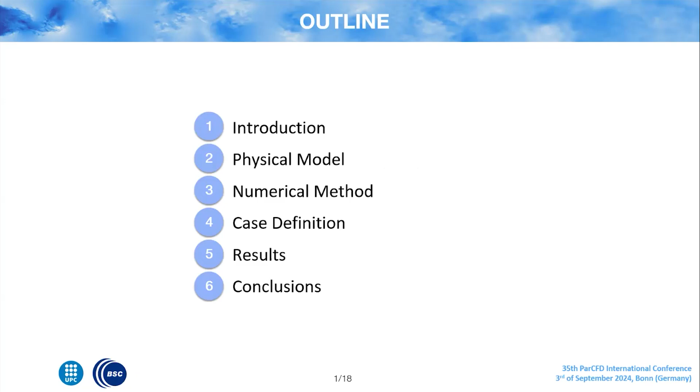Okay, so my name is Duro Diaz, and I am going to present the first results we obtained in the project named towards high-fidelity simulations of urban flows. This will be the outline of the presentation.

And to begin, cities have been regarded as centers of economic and demographic growth. For this reason, it is expected that in the upcoming years, there will be an increase of population in the city cores. In fact, the United Nations predicted that by 2050, there will be 2/3 of the global population living inside cities. So, because of the increasing problem of the climate change, the number of heat waves will increase both in intensity and in frequency.

So amplifying what is known as the urban heat island effect, which is understood as the phenomena in which the temperature inside a city is warmer than at its surroundings because of the human activity and also poor air ventilation because of the buildings. So it is very important to improve the urban climate forecasting in order to reduce the effects of these heat wave periods, and in the future it can be also used to help in city planning and also to detect episodes of high pollution.

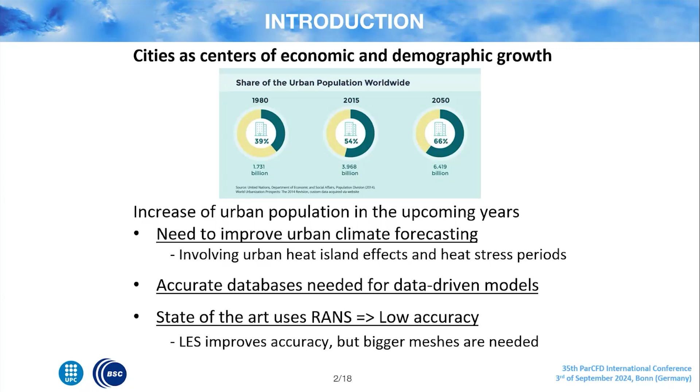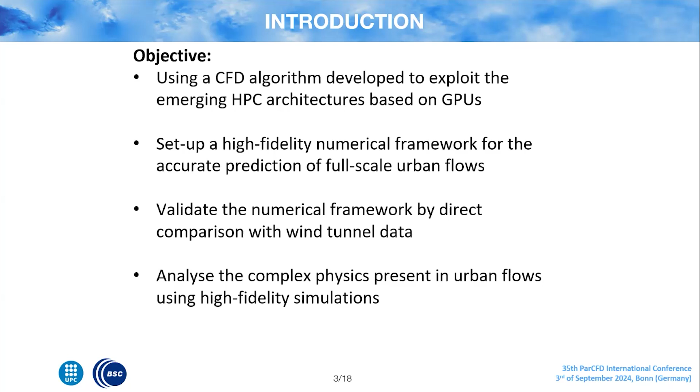So the main goal of the present work consists in taking advantage of the new pre-exascale computers by using a CFD algorithm, which has been developed in order to exploit the emerging HPC architectures based on GPUs. And to do so, we will set up a high-fidelity numerical framework in order to obtain accurate predictions of full-scale urban flows. Then we will validate it by comparing the results with wind tunnel data. And finally, we will analyze the complex physics that are present inside a city because of the interaction between buildings.

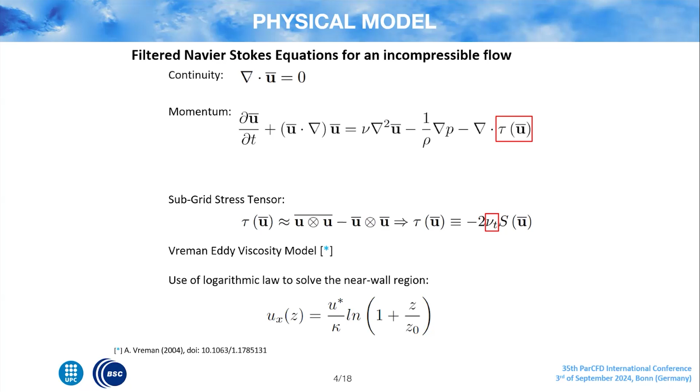So LES is more computationally expensive because it only models the dissipative ranges. To do so, spatial filtering is applied to the Navier-Stokes equations, and these scales are modeled with a subgrid stress tensor. Then the turbulent viscosity is modeled with the Vreman eddy viscosity model, and finally, in order to solve the near wall region on the ground, we use a wall model with this equation. So in a realistic scenario or in complex geometries, LES is very computationally expensive. So this kind of simulation can only be done in supercomputers.

So SOD2D is a CFD algorithm which takes advantage of the novel HPC architectures based on GPUs in order to solve both compressible and incompressible flows by using DNS and LES. Its main features are the following. It is a high-order spectral element method, which uses the Lobatto-Gauss-Legendre quadrature, in order to avoid aliasing, besides the skew-symmetric splitting of convective terms, which also helps to reduce the computational cost. And in order to introduce the lowest amount of dissipation into the system, it uses a variable diffusive viscosity. And finally, for the incompressible case, the temporal integration scheme is the one presented in the slide.

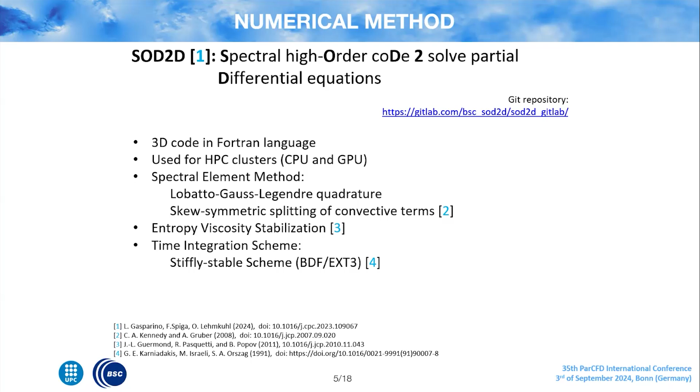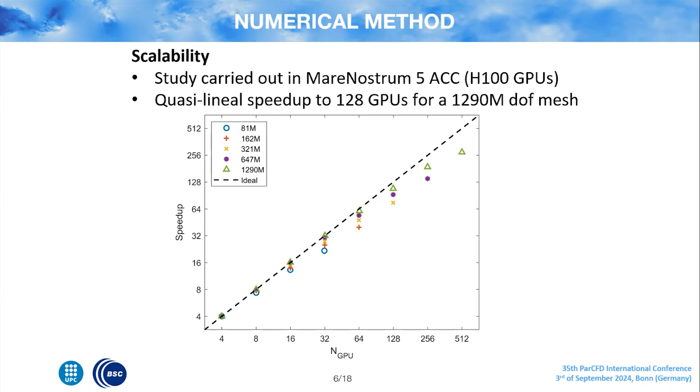Next, regarding the scalability of the code, in the next talk, Jordi Muela will dig deeper into details, but in this slide, we can see a plot of the speedup of SOD2D with a study which has been carried out in MareNostrum 5, which uses H100 GPUs. It shows a quasi-linear behavior up to 128 GPUs for a 1,300 million degrees of freedom mesh. On the other hand, regarding the iteration wall clock time, in the lower part of the graph, we can see some test cases that were done in MareNostrum 5 by using float precision, and the results of the two cases we simulated, and for case number 1, the results are at the upper part of the graph because we used double precision.

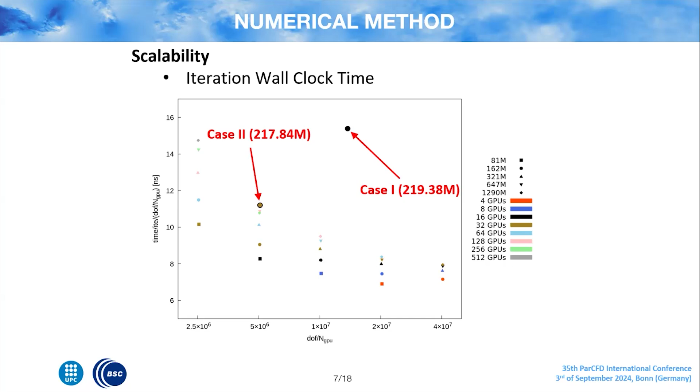So the numerical setup of our simulations is the following. First of all, we want to introduce an ABL, an atmospheric boundary layer profile, into our system, which is modeled by this equation, which depends on the U star, the von Karman constant, and the roughness length. Then our domain is divided into two subdomains. First of all, the precursor is used in order to allow the free development of turbulence of the atmospheric boundary layer. To do so, we use periodicity in the inlet and outlet, and also in the laterals of the domain. Besides, we use a wall model on the ground of the precursor.

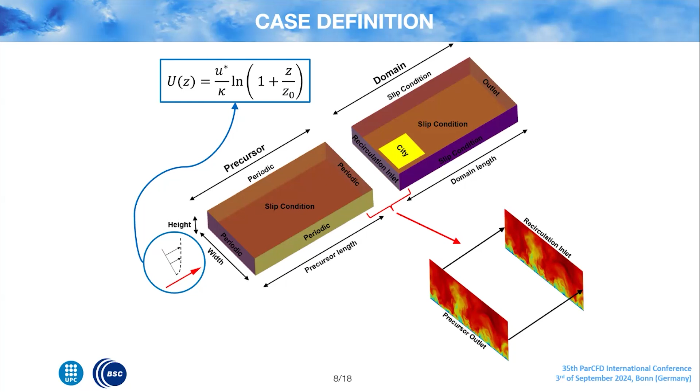And one thing we observed in preliminary simulations is that the length of the precursor must be at least 6 times the height of the domain, because otherwise, if the characteristic length of the turbulent structures was higher than the precursor length, we recycled the same structures and we didn't have the desired results. Moving into the principal domain, the value at the outlet of the precursor is injected into the inlet of the principal domain. And the principal domain contains the city, and we impose a wall model on the ground of the domain, but in the buildings, we impose a no-slip boundary condition because it is a zone with detachment and reattachment of the flow.

In order to validate our results, we used two cases with experimental results of increasing complexity. The first case consists of a matrix of 7 by 7 cubes with a height equal to 30 meters, and both the inlet conditions and the length of the domain are the same as the ones from the experiment.

But in the second case, which is known as CEDVAL, the inlet conditions are the same as the ones in the experiment, but we had to increase the height of the domain as well as the distance from the inlet to the city and the distance from the city to the outlet, because otherwise we had blockage of the flow around the city. In the second case, the complexity is bigger because it tries to replicate the shape of a European city with flat roofs.

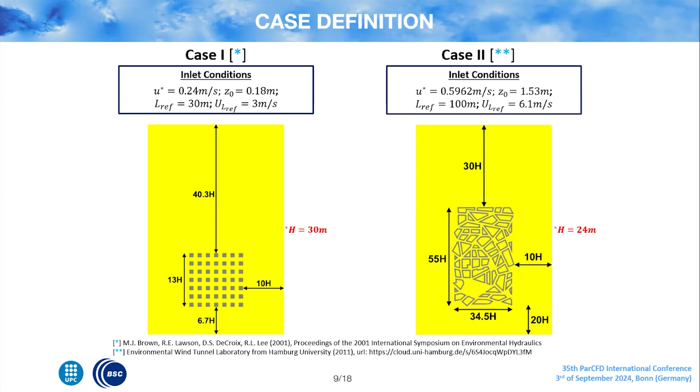So moving into the results section, in order to solve the first case, we used 3 meshes of increasing complexity. Regarding the city resolution, it involves the city itself up to a height equal to 30 meters. Then the resolution of the precursor was also increased because the two subdomains are coupled, so it was needed in order to solve correctly the ABL in this subdomain. Finally, the three meshes are of fourth order and use hexahedral cells.

Next, regarding the fine mesh with which the results were obtained, these results were obtained in 7.5 days using 16 GPUs. The total integration time was 7 hours, being equivalent to 40 flow-throughs.

In order to check the temporal convergence of the system, first of all, we checked the U star at the precursor, which is equivalent to the friction velocity in a channel. We also assessed the streamwise velocity at different stations of the domain and at different flow-throughs. It can be seen in this case that from 20 flow-throughs onwards, temporal convergence was reached.

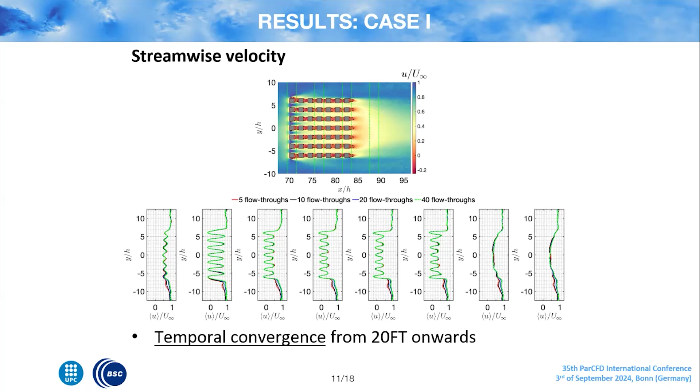Then, in order to validate the results, we use the streamwise velocity profiles. It can be seen that the results match quite well with the experiments, both for coarse and fine meshes. So the validation is successful, as our numerical setup correctly captures the behavior of the flow at the inflow region, inside the first cavity, at the top of the last row of cubes, and in the wake of the domain.

And from a more qualitative point of view, we also observe flow features reported in literature, which are flow separation, a recirculation bubble over the top of the first cube, the recirculation strength in the first cavity being higher than in the other cavities, and the attachment and reattachment length after the last row of cubes.

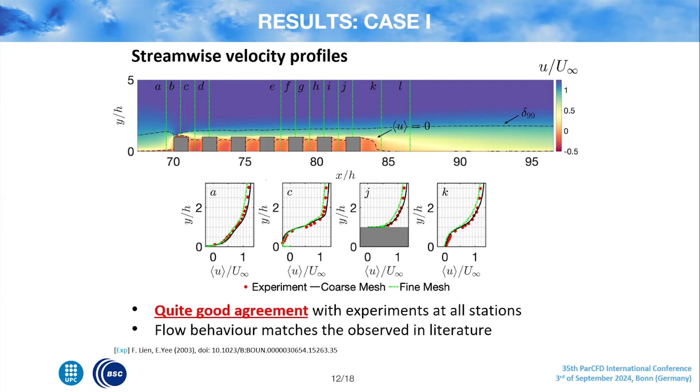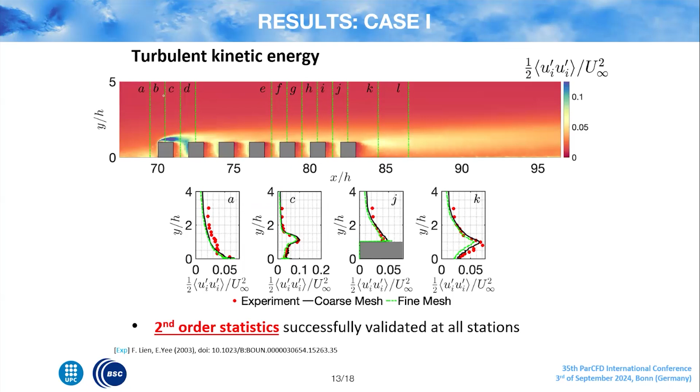To end with the results of the first case, we assessed the turbulent kinetic energy. Here, the results match quite well with the experiments; in fact, the results obtained with the coarse and the fine mesh are very similar. We also see that the peak of turbulent kinetic energy is found over the top of the first cube and inside the first cavity. So the first case has been successfully validated.

Moving into the second case, we also used 3 meshes of increasing refinement, and to have consistency, we tried to maintain the same number of degrees of freedom for the 3 cases. Regarding the city resolution, in this case it involves the city up to 24 meters, and as the complexity of the city is higher, a bigger number of nodes was located inside the city in order to capture well the features of the city geometry. So we had to save nodes at the outer part of the domain and reduce the resolution in the precursor, while being fine enough to solve correctly the atmospheric boundary layer.

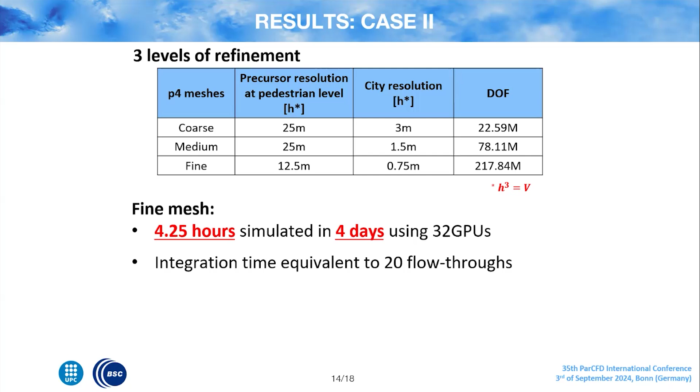In this case, the results were obtained in 4 days using 32 GPUs, and the total integration time was 4 hours and 15 minutes, which is equivalent to 20 flow-throughs.

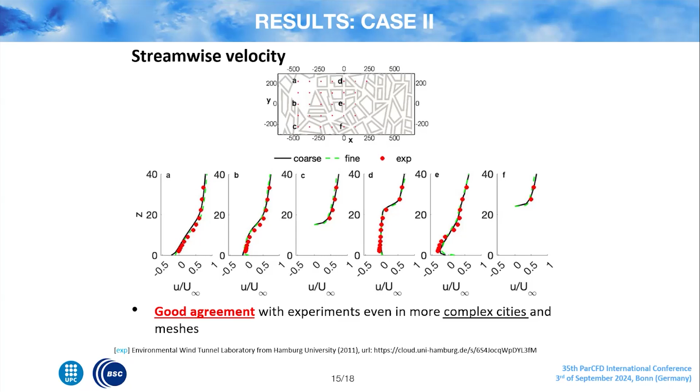In order to validate this case, we used the streamwise velocity once again at different locations, and we see that the results match almost perfectly with the experiments once again for both fine and coarse meshes. So we are able to capture the flow at different locations: in an open region, over the top of a building, or in the cavities between 2 buildings. So the numerical framework is good enough to capture the flow behavior in more complex cities.

So the main conclusions of this work are that we performed simulations of full-scale urban geometries, which have been validated using wind tunnel results, validating the first and second order statistics. Also, from a qualitative point of view, the main features of the flow field were correctly captured. And thanks to SOD2D being a high-order method, we were able to obtain good accuracy even when using a coarse mesh. Finally, when using GPUs, the wall time needed to reach temporal convergence reduces because SOD2D is able to take advantage of the novel HPC architectures based on GPUs.

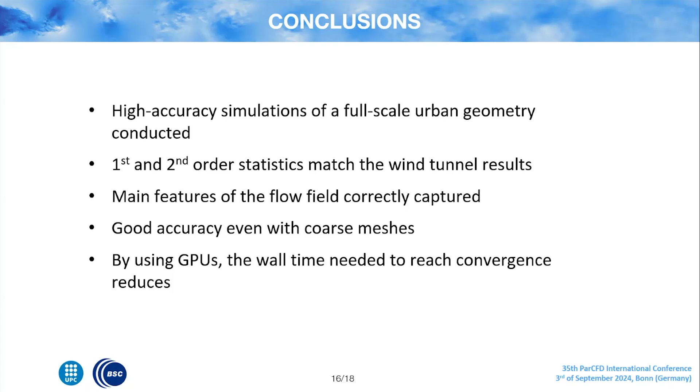And to end the presentation, the next step will be performing simulations around the city of Barcelona. The first simulation that we are doing consists of a 1.5 by 1.5 kilometer square of the surroundings of UPC Campus North. Next, we will try to find an average wind direction and an average atmospheric boundary layer profile in order to validate our results with real probes located around the buildings of Campus North.